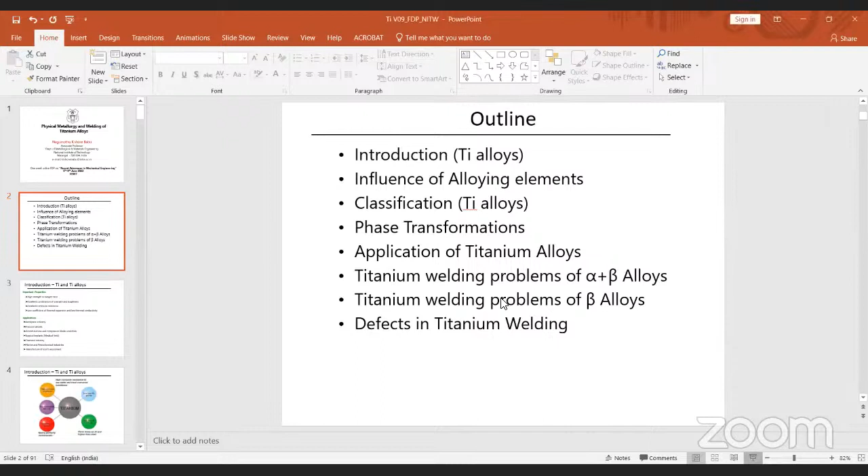Yeah, you can see. Host to disabled participant. Okay sir. Sir, I have given host to you. Yeah, I'm checking. Can you see my screen? Yes sir, your screen is visible. Okay, shall I start? Yes sir, you can start.

Once again, I welcome you for this FDP program on advances in mechanical engineering. Today I'm going to talk about physical metallurgy and welding of titanium alloys. The outline of my presentation includes introduction of titanium alloys, influence of alloying elements, classification of different types of titanium alloys, phase transformations involved in titanium alloys, and different applications of titanium alloys and problems related to welding.

There are three different types of titanium alloys: alpha alloys, alpha beta, and beta titanium alloys. We will also discuss what problems occur during welding, and defects in titanium welding.

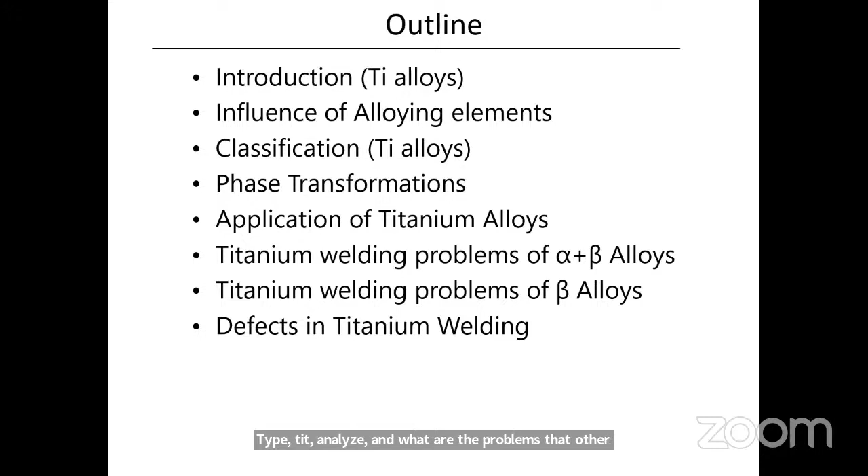Titanium alloys possess high strength to weight ratio, an excellent combination of strength and toughness, good corrosion resistance, low coefficient of thermal expansion, and low thermal conductivity. Because of low coefficient of thermal expansion and low thermal conductivity, these alloys are easier from a welding point of view. High coefficient of thermal expansion, as in aluminum alloys, generates a lot of residual stresses and promotes solidification cracking - this kind of problem will be there. But in titanium alloys, because of low coefficient of thermal expansion and low thermal conductivity, this problem during welding is less.

But all these properties make titanium alloys attractive for different applications like aerospace industry, pressure vessels, surgical implants, aircraft applications, chemical industry, marine and petrochemical industries, and also manufacture of sports equipment. Titanium alloys can be used moderately at elevated temperatures, for example in the range of 370 to 595 degrees, and especially alpha alloys can be used for creep applications, mainly for high temperature applications.

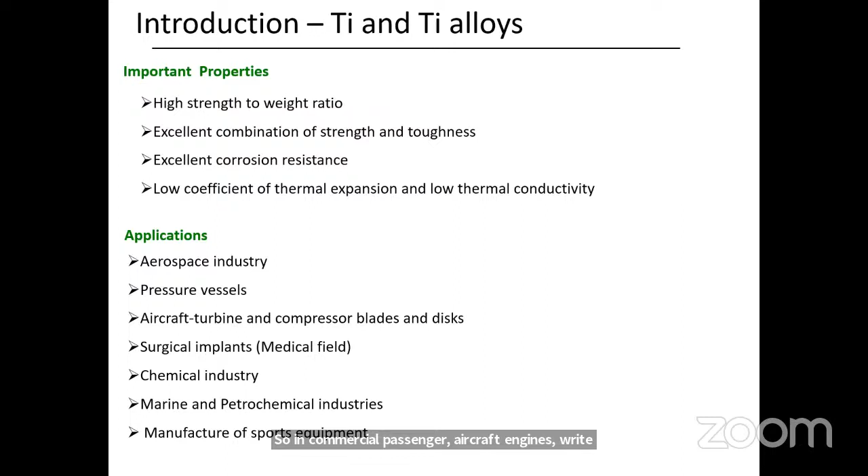If you take the example of titanium alloys, they comprise approximately 42% of the airframe weight of the new F-22 fighter aircraft. In commercial passenger aircraft engines, titanium alloys are used for the fan, the low pressure compressor, and approximately 2/3 of the high pressure compressor. You can see different applications and properties of titanium alloys: high corrosion resistance, low specific gravity, biocompatibility, non-magnetic property, and high specific strength.

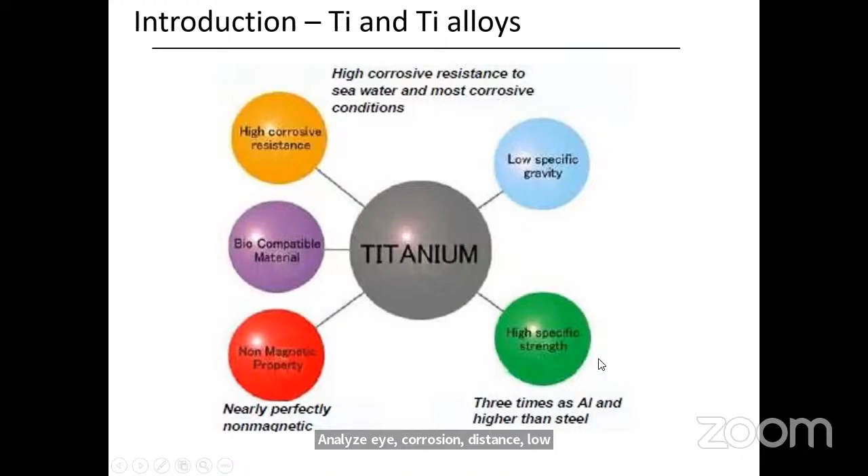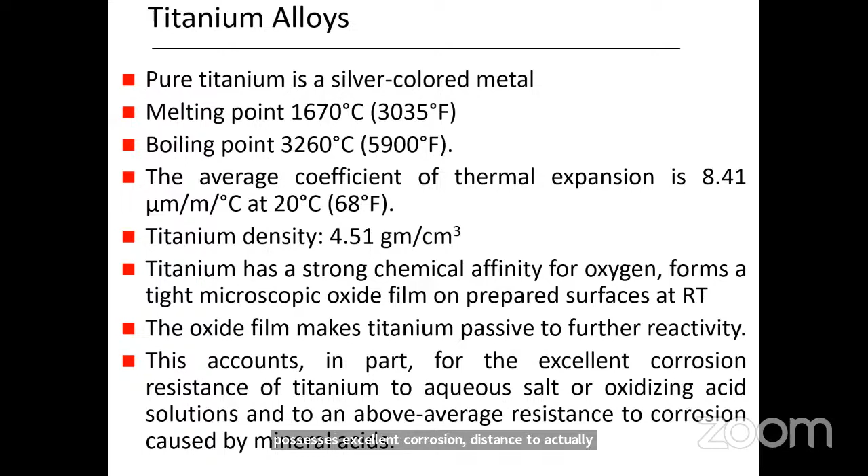Pure titanium generally shows a silver colored metal, with melting point slightly higher than steel at 1670 degrees, boiling point 3260 degrees, average coefficient of thermal expansion 8.41, and density 4.51 gram per centimeter cube. Titanium always has a strong affinity for oxygen, which is why it always forms an oxide layer on the top surface. This oxide film makes titanium passive to further reactivity, and because of this it possesses excellent corrosion resistance to aqueous salt or oxidizing acid solutions, and above average resistance to corrosion caused by many mineral acids.

If you compare the cost of titanium, steel ore costs only $0.02 per LB, but titanium is $0.22 per LB. If you take sheet form, steel is only $0.3 to $0.6 per LB, but titanium costs are very high, $15 to $50 per LB. This high cost of titanium compared to steel and aluminum is because of high extraction cost and high processing cost. The processing temperatures used for titanium are very low, and at these processing conditions the surface regions get contaminated very easily, so these surface cracks must be removed after processing, which requires high cost - that's why titanium sheet cost varies from $15 to $50 per LB.

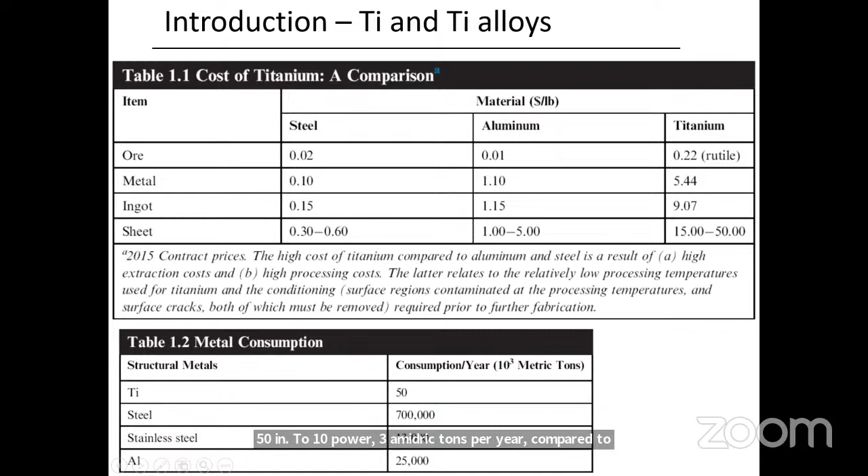Also, metal consumption of different materials you can see here. Titanium consumption is very low because of high cost, at 50 into 10 power 3 metric tons per year, compared to steel at 700,000 and aluminum at 25,000.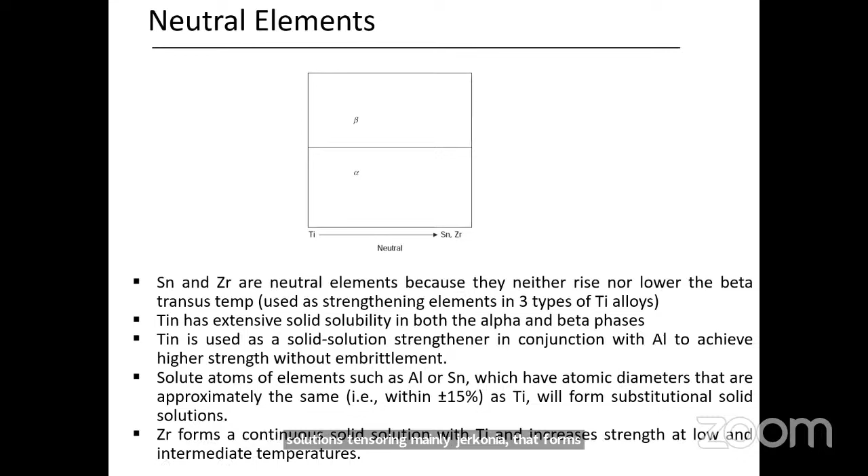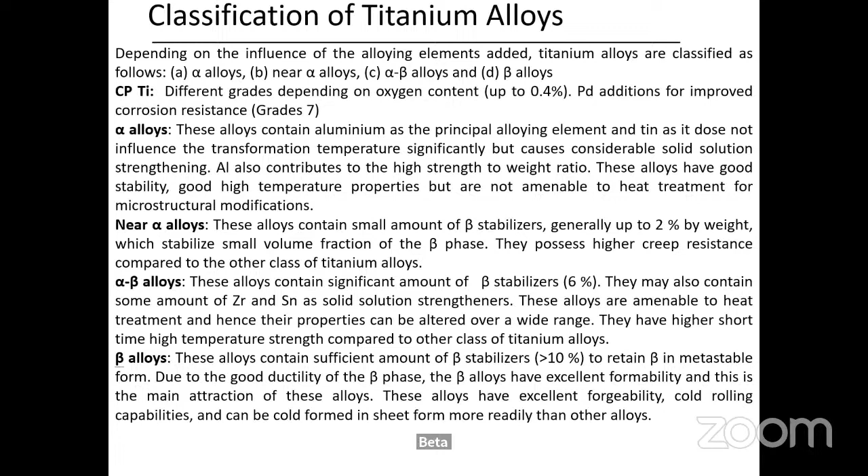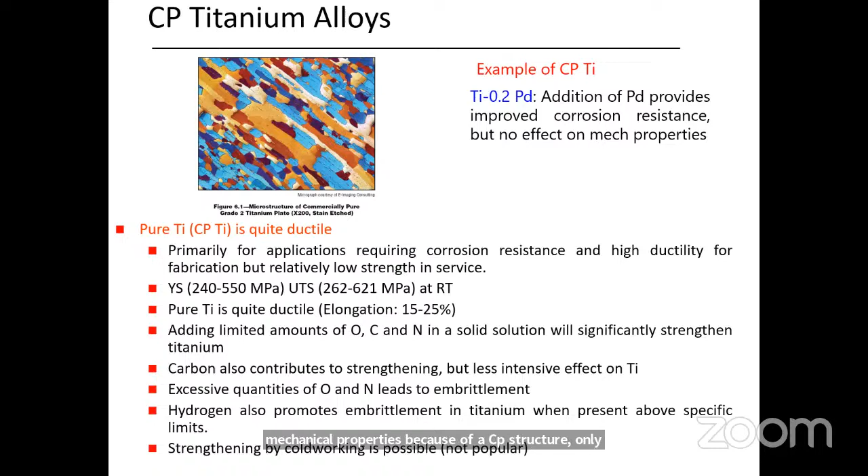Strengthening by cold working is also possible but not popular. Aluminum alloys have an FCC crystal structure, so cold working improves their mechanical properties. But titanium has an HCP structure, so only a limited number of slip systems are available - that's why cold working is possible but not popular.

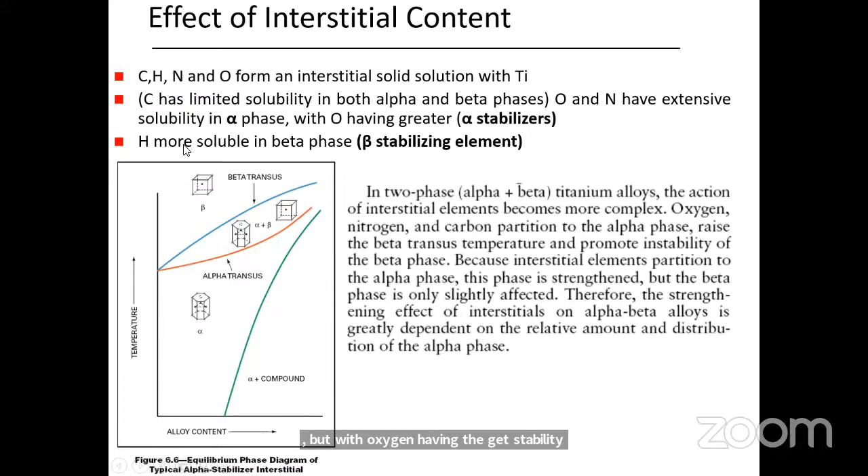Looking at this phase diagram, when you add alpha stabilizers, it raises the beta transition temperature. For example, oxygen, nitrogen and carbon are alpha stabilizers, and they raise the beta transition temperature. These interstitial elements like oxygen and nitrogen have extensive solubility in the alpha phase, with oxygen having the greater stability. Hydrogen is more soluble in the beta phase than the alpha phase.

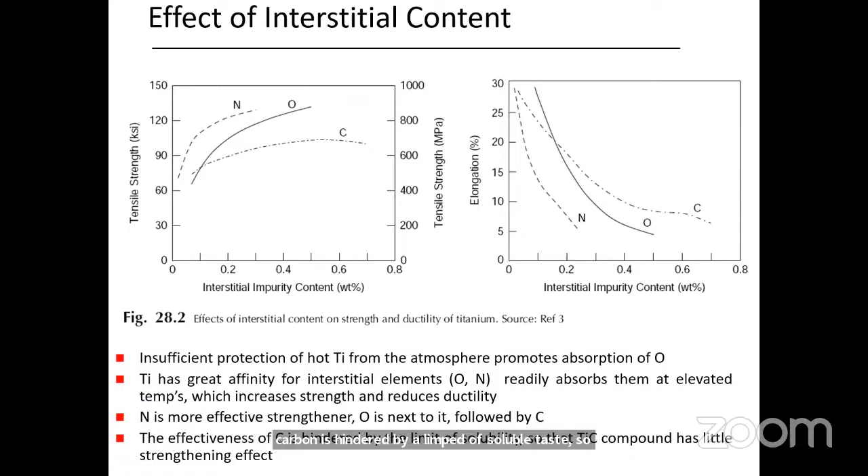This shows the effect of interstitial content on strength and ductility of pure titanium. When adding impurity content like oxygen, nitrogen or carbon, strength keeps increasing - here it's approximately 450, 410 or 420 MPa, but when increasing the oxygen content, strength goes up to 800. So adding interstitial content drastically improves strength, but ductility drastically decreases as impurity content increases. Nitrogen is the more effective strengthener, followed by oxygen, then carbon. The effectiveness of carbon is hindered by its limited solubility, so titanium carbide compounds have a smaller strengthening effect compared to nitrogen and oxygen.

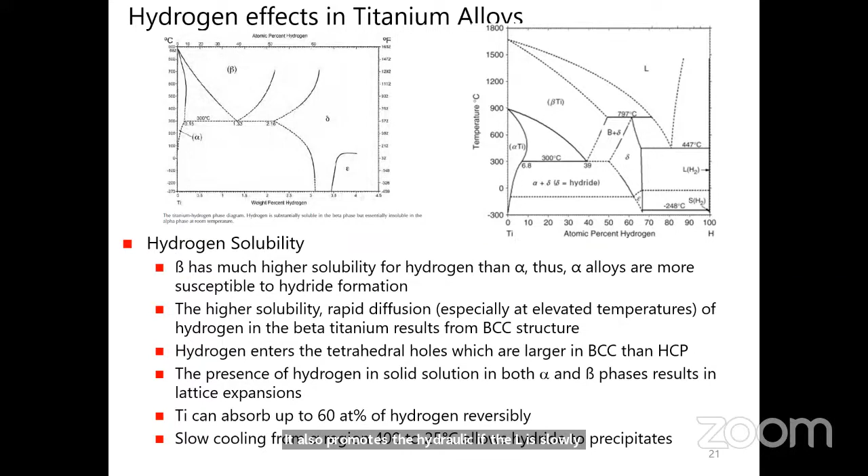The presence of hydrogen in both alpha and beta phases results in lattice expansion. It also promotes hydrogen embrittlement. If the alloy is slowly cooled from the alpha region to room temperature, generally these hydrides start precipitating out, which promotes the hydrogen embrittlement.

Hydrogen is only slightly soluble in the alpha phase. It is soluble only up to 8 atomic percent, but that is approximately equivalent to 0.15%. If the alloy is slowly cooled from the alpha phase field, the hydride starts precipitating out. Even if you cool slowly, it causes notch sensitivity because hydride starts precipitating out throughout the alpha grains and also at the grain boundaries.

When you quench it from the alpha phase field, hydrogen precipitates throughout the alpha grains as very fine particles, but it will have little effect on sensitivity. But when you start aging, again this agglomeration of hydrides takes place, and again it increases the notch sensitivity.

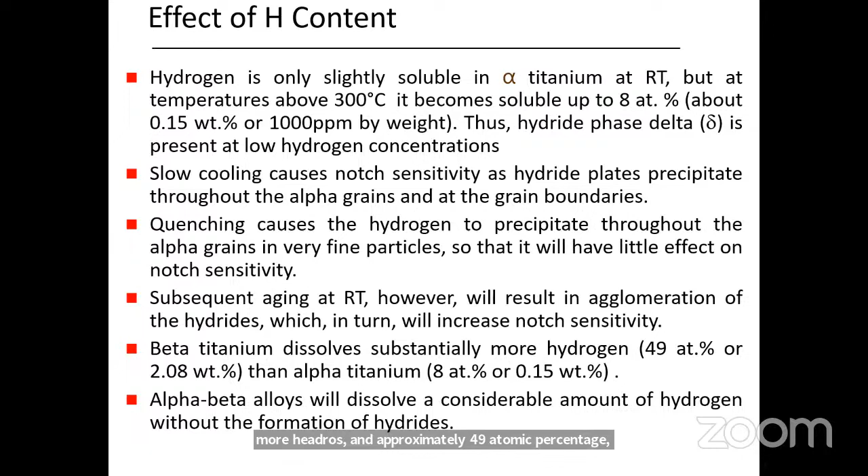So beta alloys, as I mentioned, can dissolve more hydrogen, approximately 49 atomic percentage, which is equivalent to 2.08 weight percentage, compared to alpha. So alpha-beta alloys will dissolve a considerable amount of hydrogen without the formation of hydrides.

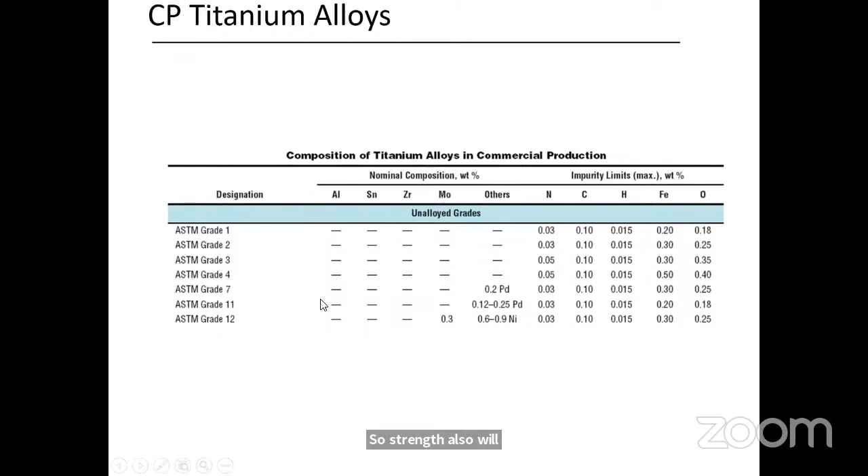In alpha alloys, as I already mentioned, aluminum is the principal alloying element. These alloys also contain zirconium and tin, which are neutral elements mainly added for improving solid solution strengthening. These alloys possess good high temperature properties and weldability, and are not amenable to any heat treatment.

These alloys can also be used for cryogenic applications. You can see these are the different grades of CP titanium alloys or alpha titanium alloys. These alloys contain some amount of oxygen, and the beta transus temperature for these alloys is also given here, along with yield strength and tensile strength values.

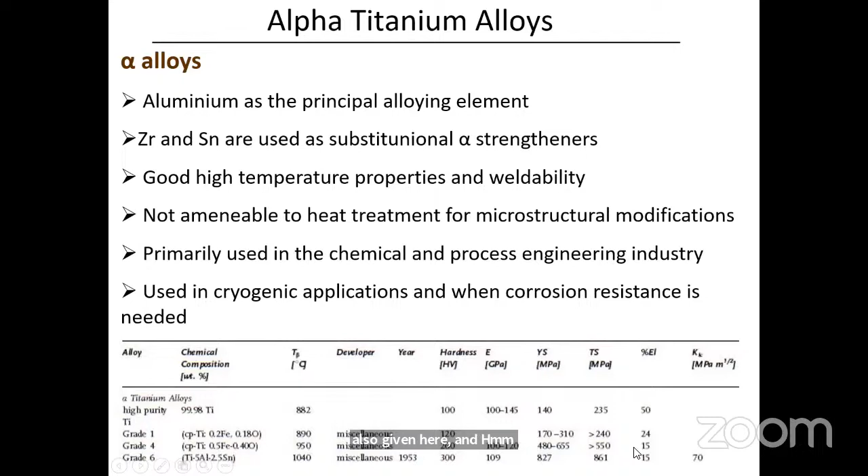So this is the phase diagram between titanium and aluminum. When adding aluminum, up to 6 to 8% can be added in commercial titanium alloys. If it crosses greater than 8%, mainly intermetallics start forming. You see here, in this region Ti3Al is forming, at this region TiAl is forming, and here also, greater than 50% aluminum, it is also forming TiAl2 and TiAl3.

So when you increase the aluminum content, embrittlement occurs. Mainly intermetallic compounds are forming, which is not beneficial - it mainly promotes embrittlement. That's why there is a limit to adding aluminum content in titanium.

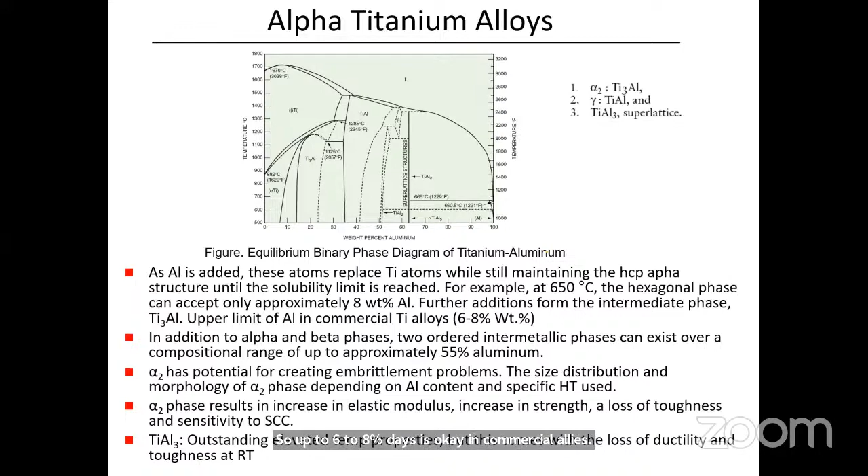So up to 6 to 8% aluminum is okay in commercial alloys. If it is greater than that, many intermetallic compounds will form. If the aluminum content is in the range of 14 to 26, it forms Ti3Al. At 34 to 56, it forms TiAl. These are all intermetallic compounds. Generally, the stability of the alpha phase can be defined using an equation called aluminum equivalent.

Aluminum equivalent equals aluminum plus tin divided by 3, plus zirconium divided by 6, plus 10 times oxygen. When you add small amounts of oxygen, carbon or nitrogen, because it's multiplied by 10, the aluminum equivalent increases. If it crosses greater than 9%, it's a problem - embrittlement occurs. That's why you need to keep the aluminum equivalent less than 9% so it can be used for commercial applications.

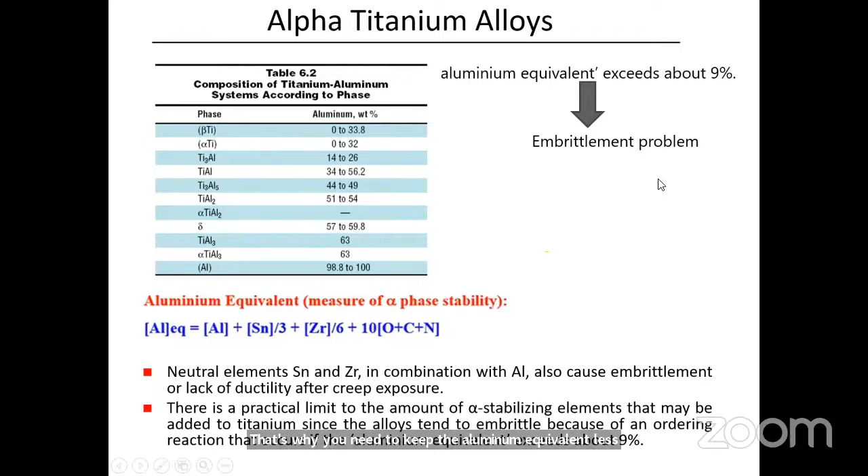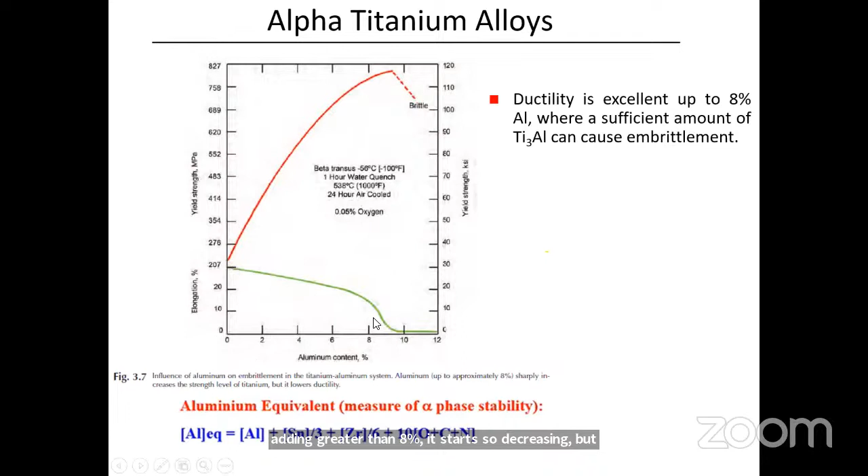Similarly, you see here with aluminum content: if you add greater than 8%, ductility starts decreasing but strength increases. Up to 9%, when you add aluminum content, strength increases but ductility starts decreasing because of this embrittlement problem.

So these are examples of different CP titanium welds used in heat exchanger applications.

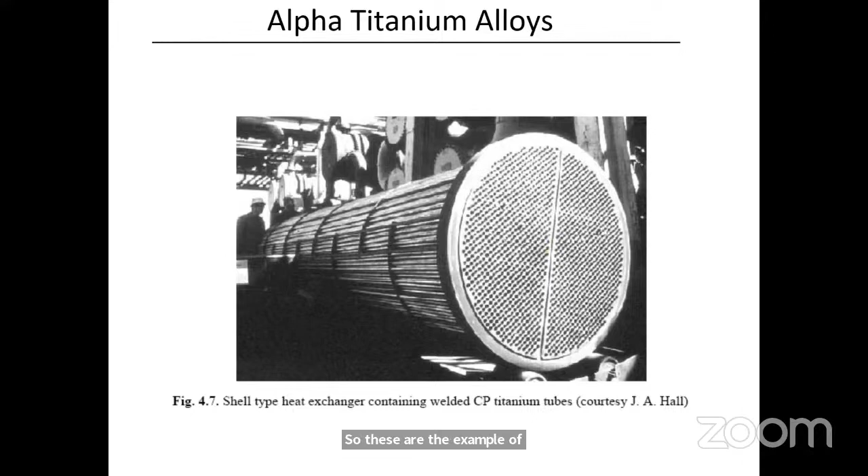These are commercially pure titanium alloys used in different applications in power plants and other industries. You can see water plants, pulp and paper industry, chemical industry, mineral dressing, biomedical devices, spacecraft, and specific equipment from the power generation industry, water plants, and environmental applications - they are used in these industries as well.

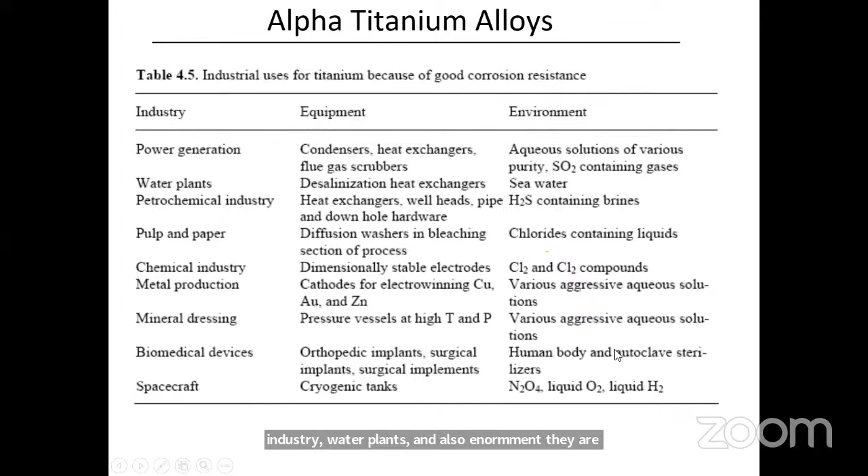So for near alpha alloys, we know that the principal alloying element of alpha alloys is aluminum. In near alpha alloys, it contains some amount of beta stabilizers - you can add up to 2 weight%. These alloys also possess higher creep resistance, and the majority of these alloys contain some amount of carbon and silicon, mainly for improving the creep resistance.

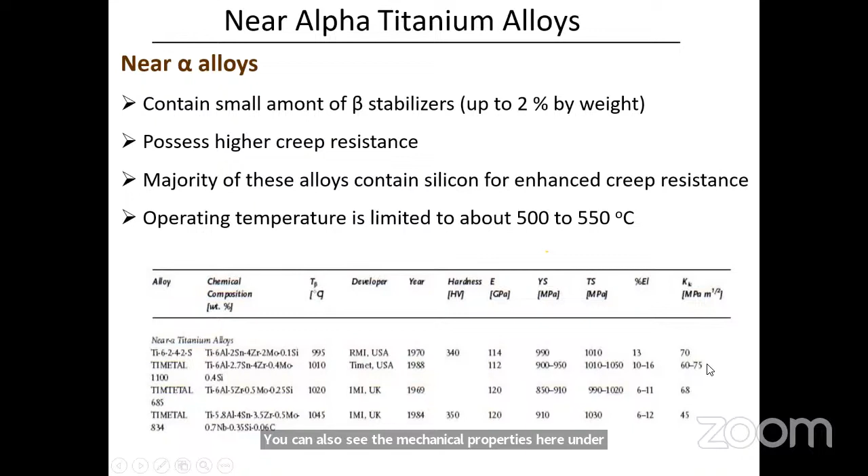So the next classification is alpha beta alloys. These alloys contain a significant amount of beta stabilizers, up to 6 weight%. These alloys also contain tin and zirconium as solid solution strengtheners. You can do heat treatment for these alloys, but near alpha alloys cannot be heat treated. However, creep strength is lower than near alpha alloys. So these alloys can be used either in annealed condition or in solution treated and aged condition.

These alloys exhibit high strength-to-weight ratios in heat treated condition, and also possess good fracture toughness, in the range of 65 to 110 MPa.

The most famous alpha beta titanium alloy is Ti64, titanium 6 aluminum and 4 vanadium alloy. Aluminum is an alpha stabilizer and vanadium is a beta stabilizer. These alloys possess yield strength in the range of 800 to 1100 MPa, and ultimate tensile strength in the range of 900 to 1200 MPa, with a good percentage of elongation - good ductility, having 13 to 16%.

Phase transformations of these alpha beta alloys - you can see here. This is a pseudo binary phase diagram. On the left hand side you see the temperature, and you vary the beta content here, the vanadium content, since vanadium is a beta stabilizer. You vary beta content here, and the titanium 6 aluminum vanadium composition lies in this region. This is titanium 6 aluminum and 4 vanadium.

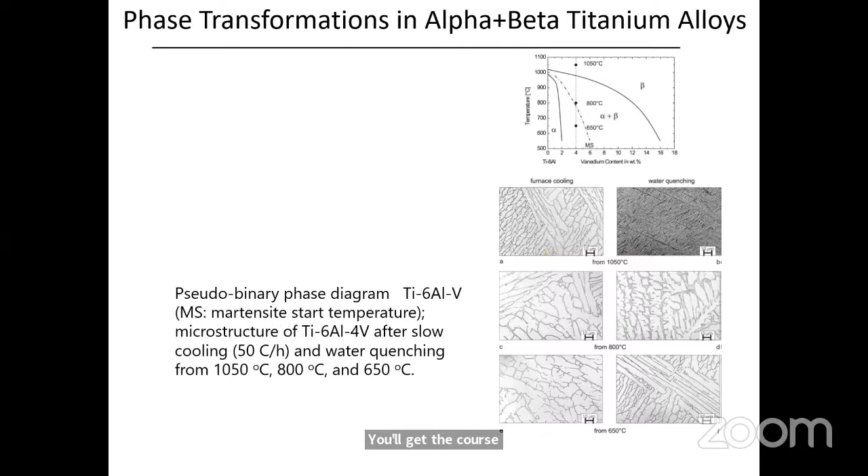So this is a similar kind of diagram, pseudo binary phase diagram, titanium 6 aluminum you can see on the left hand side, and varying vanadium content.

The main problem here is at 840 degrees. If you quench from this temperature, you will not get martensite, because the vanadium content of beta phase is approximately 14%. That is sufficient to place the MS temperature below room temperature. Even if you quench from the beta phase field, you will not get 100% martensite, because the martensite finishing temperature is below room temperature, so some retained beta will be there.

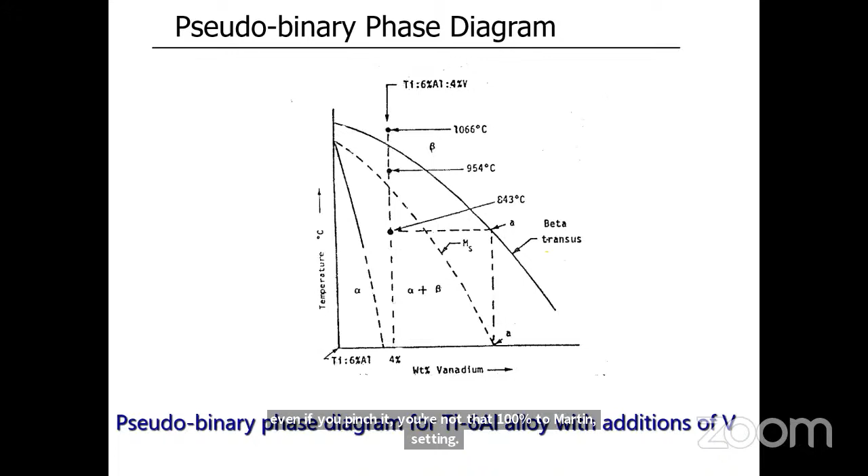Similar to austenite also, even if you quench, you will not get 100% martensite even in steels, because some retained austenite will be there. Similarly, retained beta will be there in titanium alloys. Same thing explained here.

This is the continuous cooling diagram for alpha beta titanium alloys. So during continuous cooling of alpha beta titanium alloys, this line is the beta to alpha transus temperature, and this is the finish of beta to alpha temperature, and in between you can see the alpha plus beta region and different cooling rates. So what happens during continuous cooling?

Principally, the decomposition of beta occurs, so diffusional controlled transformations like nucleation and growth of alpha formation take place. If you quench fast, like this curve, these are the fast cooling rates, then you will also get diffusionless or shear transformation to martensite. Or sometimes, if it is in between, you will get a mixed mode of transformation, that is, initial transformation is a diffusional transformation, then it is interrupted by martensitic transformation.

So here you can see the different cooling curves superimposed on this diagram: A, B, C1 and C2. You can see here cooling rates right of C2, meaning very slow cooling rates. So here you will get a coarse lamellar kind of microstructure. Cooling rates left of C1, this is the critical cooling rate.

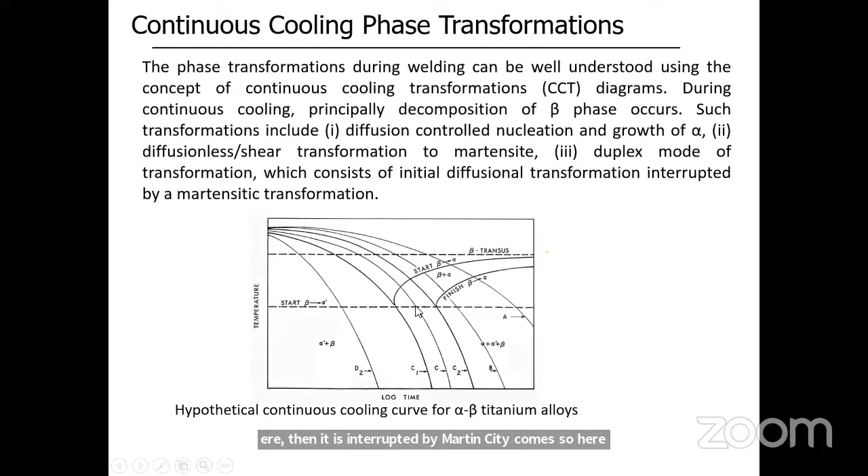So this is transmission electron microscopy of EB welds of Ti64 welds. This is one of my research papers published in Science and Technology of Welding and Joining. These are the TEM micrographs, transmission electron microscopy figures.

Here you can see how the martensitic microstructure will appear: the alpha prime martensite in a zigzag fashion. And also you can see the lines present here, these are the dislocations. We also obtained a diffusional product, which means we got a mixed mode of transformation. So the initial transformation is alpha-beta transformation, that means a diffusional product you will get, which is then interrupted by martensitic transformation.

When you do aging for this martensitic microstructure or this retained beta, for Ti64 alloy, a fine dispersion of beta in alpha is formed. Alpha starts precipitating out from the beta phase, and also you can see the beta particles also start precipitating out from the alpha prime.

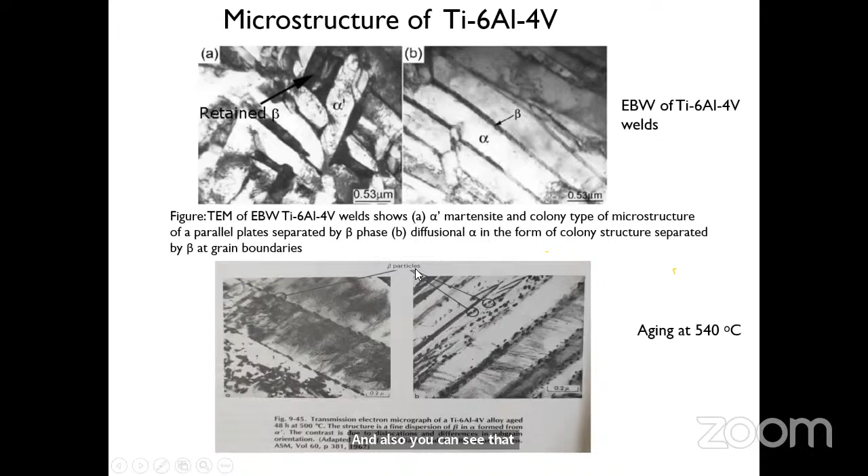Beta alloys contain sufficient amounts of beta stabilizing elements. So greater than 10%, when you add beta stabilizers, it retains beta even at room temperature, meaning there is no alpha phase. So when you keep on adding beta stabilizers, greater than 10%, it can retain the beta phase.

Because of the good ductility of the beta phase, beta alloys possess excellent formability, and also these alloys possess excellent forgeability and cold rolling capabilities. You can easily weld these alloys in the annealed condition.

So the most famous alloys are titanium 1533. These alloys contain 15% vanadium, 3% chromium, 3% aluminum, and 3% tin. In the annealed condition, yield strength is in the range of 800 to 1000, and tensile strength 800 to 1100. When you do aging, you can still increase the strength, but ductility will decrease.

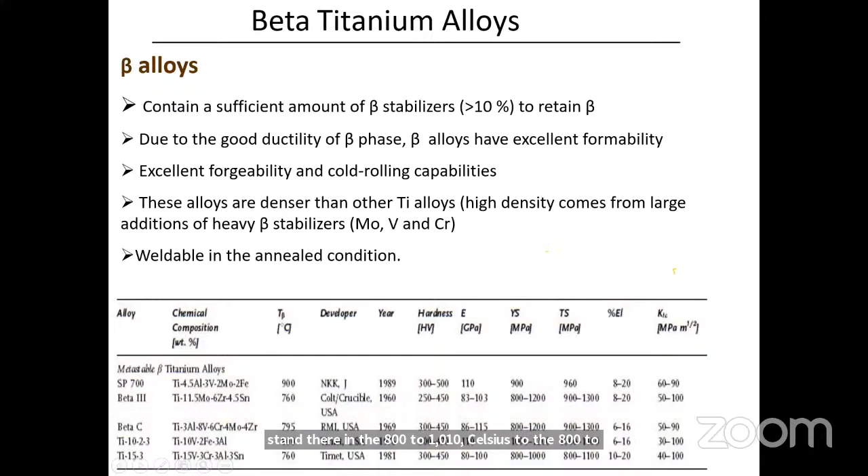So beta alloys are again divided into two types: metastable beta and stable beta alloys. This dotted line is the MS, martensitic starting temperature, and this line is the beta starting, beta transus line, this is what it's called. So if it is in between, then it is called metastable beta alloys. If the beta stabilizing element crosses this beta S point, then it is called stable beta alloys.

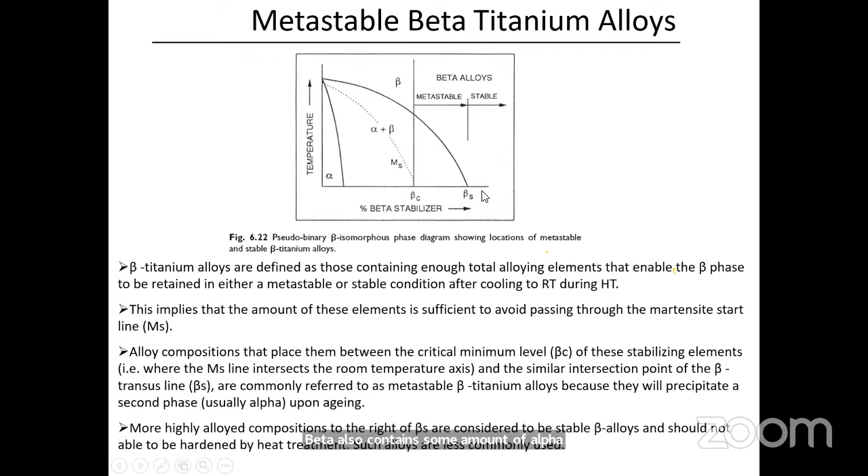So the critical minimum level is called beta C, where this MS line intersects the room temperature axis. In between this region is called metastable beta. Metastable beta also contains some amount of alpha stabilizers. But stable beta means when you are adding more beta stabilizers, greater than 10%, this beta phase will be retained even at room temperature.

So these are the beta stabilizers, you can see vanadium, niobium, these are different beta stabilizers. The stability of the beta phase can be defined using a formula called molybdenum equivalent: molybdenum plus 2.5 times iron, 1.7 times cobalt. These elements are iron, chromium, cobalt, manganese, nickel, and chromium, and these solutes are more effective than molybdenum because they're multiplied by 2.5 times, 1.7 times. Other elements like 0.67 times vanadium are less effective than molybdenum, so these are less stable.

Suppose this molybdenum equivalent is 0 to 5%, these are beta-rich alloys. If it is 5 to 10%, that is near-beta. Metastable beta means if it is in between 10 and 30%, these alloys are called metastable beta alloys. If the molybdenum equivalent is greater than 30%, that is completely stable beta. So these are examples of different metastable beta and beta alloys: 10-2-3 means this is a metastable beta alloy, and stable beta means if it is 30 and above, it is called stable beta alloy, based on molybdenum equivalent.

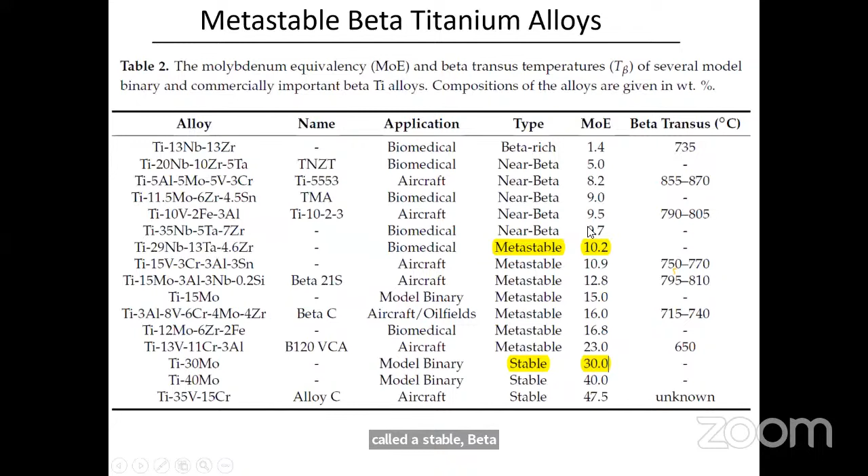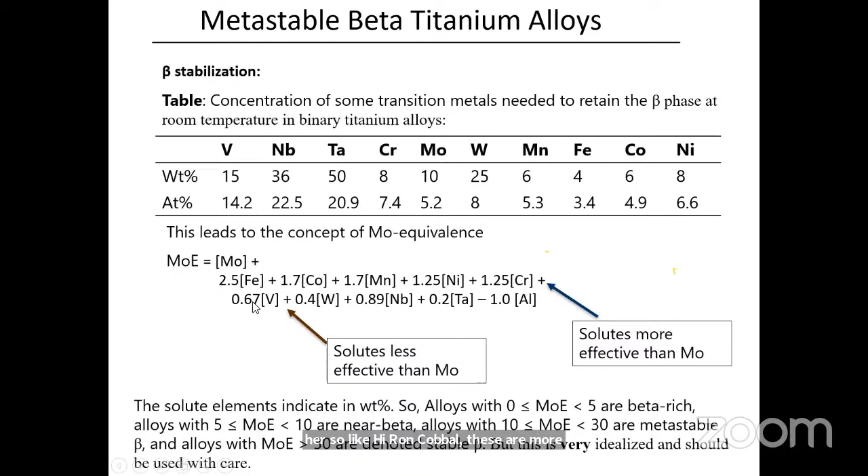And here you can also see the different beta transus temperatures for these alloys. So this shows the influence of alloying on the concentration necessary to retain 100% beta. Some alloying elements, as I showed previously, like iron and cobalt, are more effective than other elements. That's why when adding iron, only 3.5% can retain 100% beta even at room temperature. But for tantalum, if you want to retain the beta phase at room temperature, you need to add 45%. So that is the difference between different alloying elements on beta phase stability.

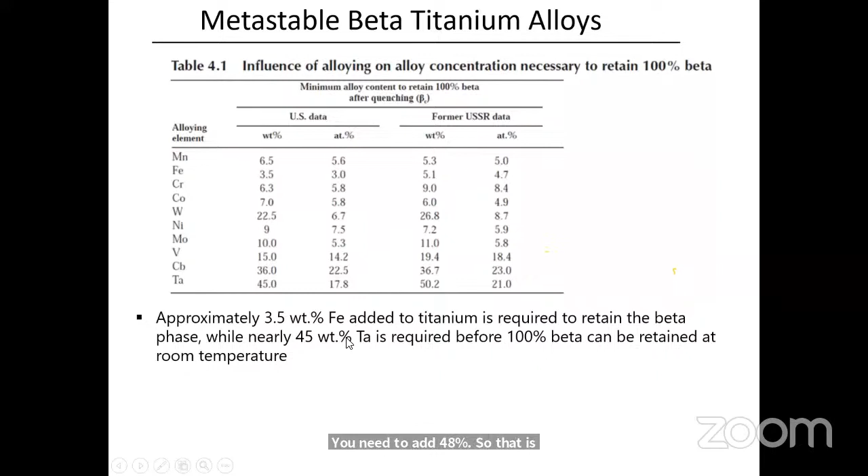So metastable beta alloys possess a BCC structure. Because of the number of slip systems available, you can readily do cold working in the beta phase field. After quenching, you will get equiaxed beta phase. These alloys you can heat treat: the first step is heating above the beta transus temperature, followed by quenching, and then you do aging heat treatment, generally at 500 to 600 degrees.

Then alpha starts precipitating out, and you can increase the strength, but ductility will be drastically decreased. These alloys possess excellent fabricability and good tensile strength. When you start adding beta stabilizers, the creep strength will be decreased. They have good weldability, and this is an example of a metastable beta alloy. These alloys are generally used in the solution treated and aged condition.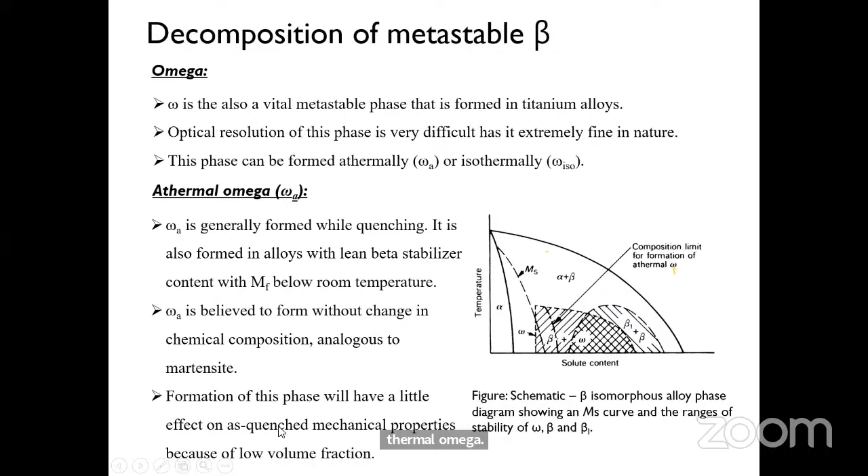Suppose if you are heating this metastable beta alloy in the temperature range of 300 to 350 degrees centigrade, and holding for sufficient time, then isothermal omega starts precipitating in this region. That means if you are keeping for more than 24 hours at 200 to 500 degrees, then omega starts precipitating out. Then it is called isothermal omega.

This isothermal omega has composition intermediate between alpha and beta, and as you keep increasing the aging time, this omega will act as a precursor for the formation of alpha phase. If the isothermal omega percentage is greater than 50%, then embrittlement problems occur.

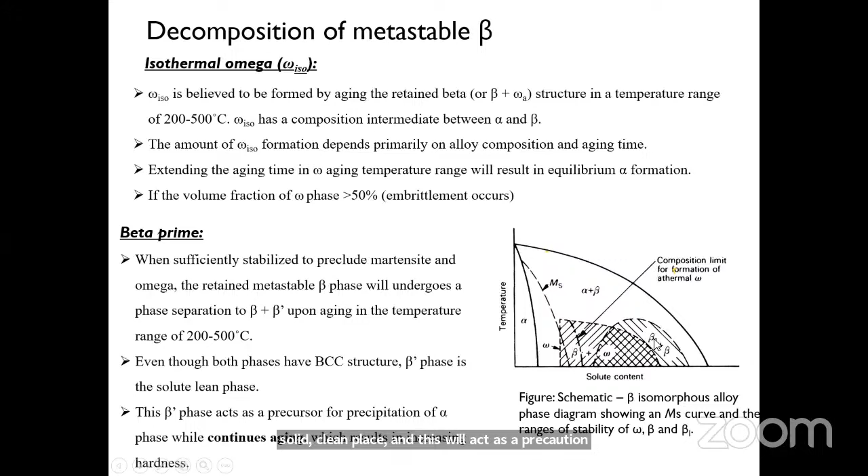But still, if you are adding more solute content, then beta prime starts precipitating. Generally beta prime is a solute lean phase, and this will act as a precursor phase, and as temperature increases, as aging time increases, alpha starts precipitating out from the beta prime phase.

So generally in metastable beta alloys, two-step aging is preferable. First step aging is done at 300 degrees and second step aging at 500 degrees. In the first step aging, if the alloying content is low, omega phase will form; if the alloying content is high, beta prime will form.

Precursor phases like omega and beta prime form in the first step aging. Upon continued aging, this will act as a precursor and alpha starts precipitating out, forming fine alpha platelets. That is responsible for increasing the strength.

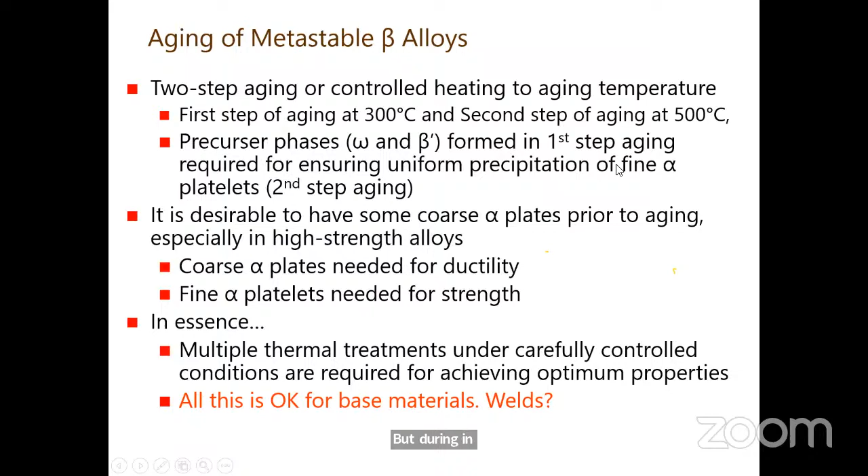If overaging occurs, the alpha platelets start coarsening and will increase, then your strength will decrease. But during aging in general, if fine alpha platelets are forming, generally strength will increase and ductility will decrease. So far we have discussed alpha alloys, alpha beta, and beta alloys.

Alpha alloys are generally used for high temperature application, creep application. When you are adding beta, increasing beta content, the heat treatment response will increase. Alpha alloys are not amenable to any heat treatment, but heat treatment response will increase. But creep strength will decrease in this region and beta region.

But here you can see increasing alpha content; when you are adding more alpha stabilizers, creep strength will increase. From right hand side to left hand side, these alloys are mainly for creep strength, and moving the other way improves heat treatment capability, and also suitability for fabricability, meaning suitable for cold rolling applications.

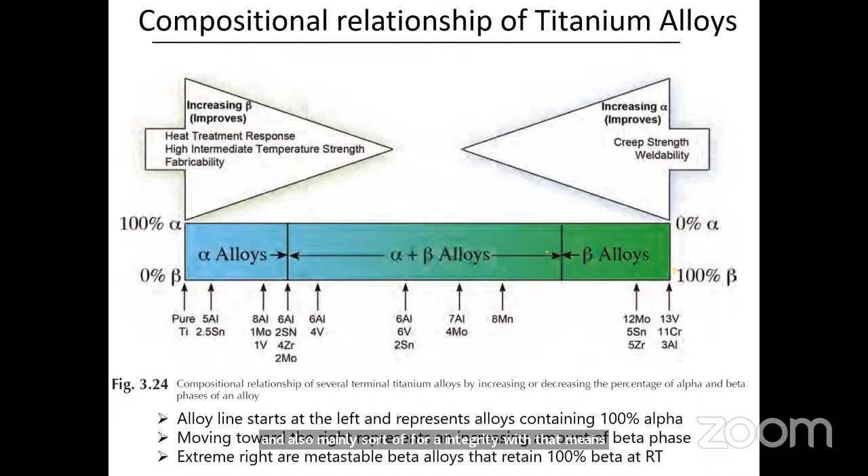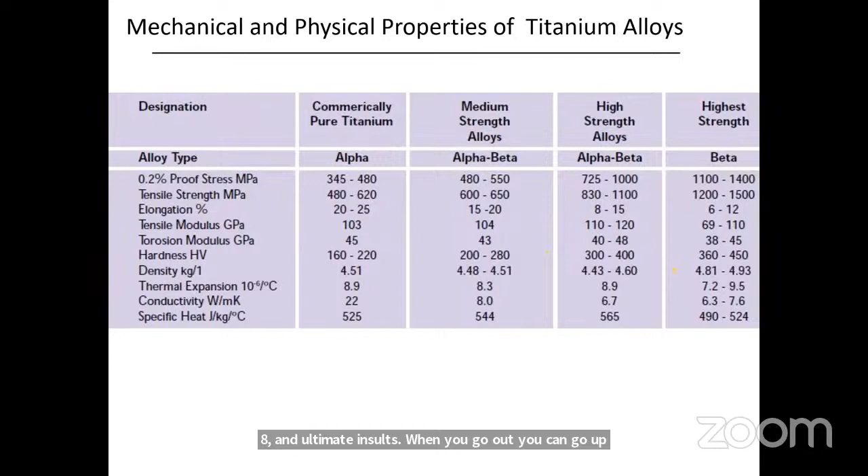These are different examples of alpha, alpha beta alloys and you can see the mechanical properties. The alpha beta alloys generally vary from 800 to 1000 MPa yield strength, and ultimate tensile strength can go up to 1100 MPa. But beta alloys give even higher strength because alpha starts precipitating out during aging. These are examples like titanium 6 aluminum 4 vanadium alloy used in jet engine applications.

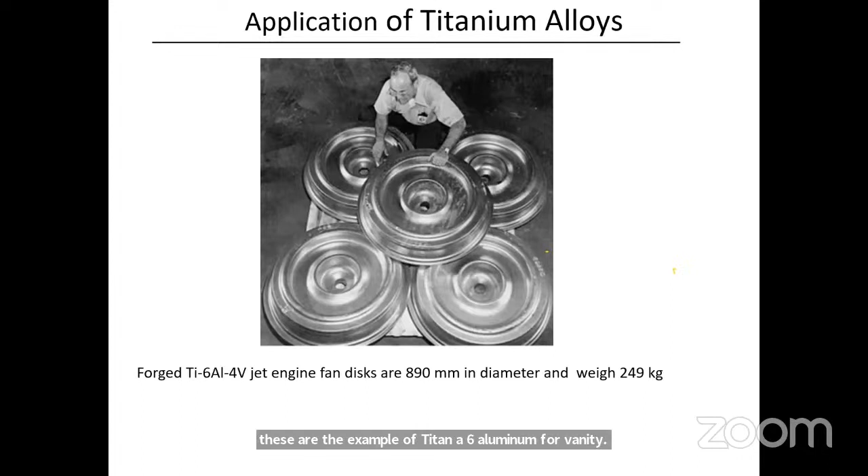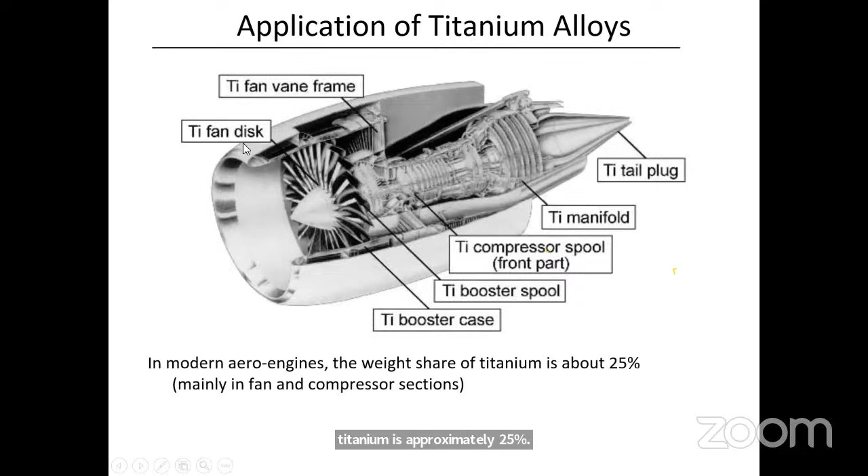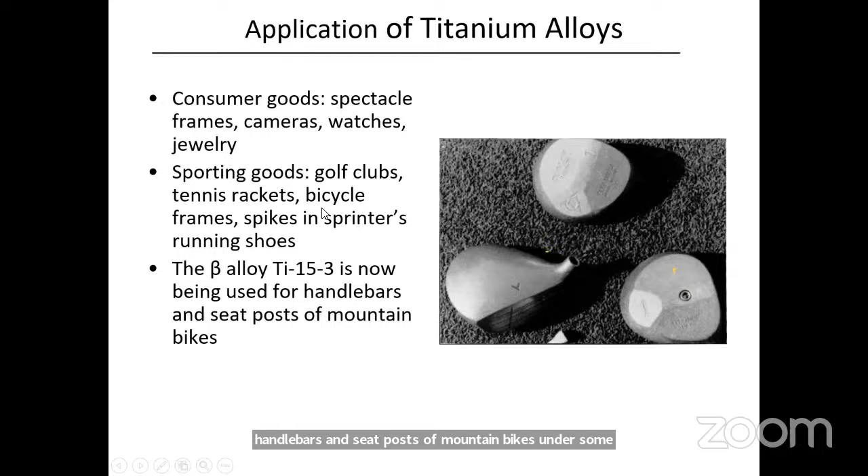Titanium alloys are also used in sports applications. The metastable 1533 beta alloy is used for handlebars and seat posts of mountain bikes, and some sporting goods like golf clubs, tennis rackets, and bicycle frames. So these are also made of titanium alloys.

Metastable beta alloys, especially these beta titanium alloys, can be used because these alloys possess low modulus and high strength. That's why these alloys are used mainly for automotive suspension coil, rotor, and connector applications. Nowadays many parts used for automobiles are made of steel that can be replaced with beta titanium alloys. The main advantage is weight saving applications by replacing with these alloys.

Titanium alloys are also used in human body applications and dental applications. Here you can see hip or knee prosthesis - good corrosion stability in the human body, and these alloys possess good fatigue resistance, high strength to weight ratio, and low elastic modulus. Beta titanium alloy especially has low elastic modulus compared to other alloys. This low elastic modulus is particularly relevant because it's an important requirement for bone replacement.

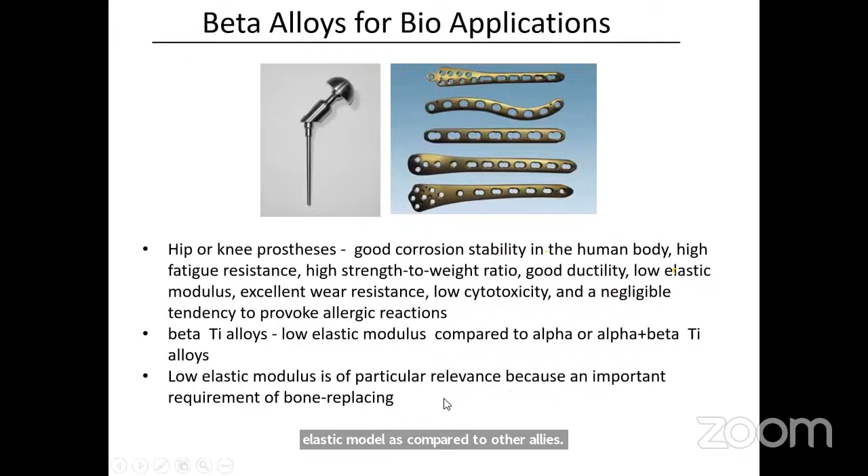So far we discussed alpha, alpha-beta, and beta titanium alloys. Now I'm going to talk a little about titanium welding.

When doing titanium welding, titanium readily picks up gases like nitrogen, oxygen, and hydrogen, which are interstitial elements that can easily enter the titanium lattice if the temperature exceeds 430 degrees. They occupy interstitial sites, which reduces the number of slip systems. So the strength increases, but ductility decreases. The number of dislocation systems also decreases, so deformation is not that easy.

If interstitial elements exceed certain limits, stresses generated during welding may cause cracking. Here you can see the cracking. Generally, oxygen levels on the order of 3000 ppm in the weld metal may be acceptable. If it exceeds that, cracking generally occurs in the weld metal zone or heat affected zone.

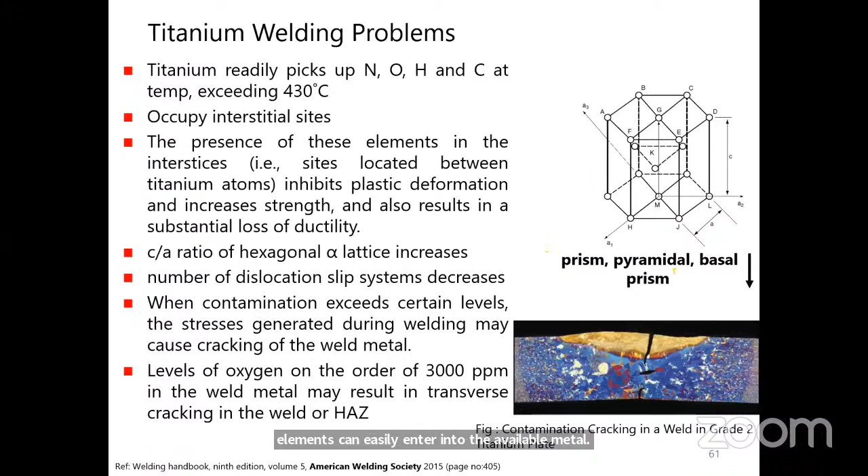That's why when doing arc welding with titanium alloys, in TIG welding or MIG welding we use argon or helium as shielding gases. But in addition to torch gas, we need to provide backing and trailing gases also for welding titanium alloys. Otherwise, these elements can easily enter the weld metal and degrade the mechanical properties, and sometimes promote cracking. Above 650 degrees titanium tends to oxidize more rapidly, and if you don't remove the oxide layer, it is a problem. That's why you need to use protective shielding such as an inert gas atmosphere, like argon shielding.

Trailing and backing gases also need to be used. Another advantage is the relatively low coefficient of thermal expansion and conductivity of titanium, which reduces the possibility of distortion caused by welding. Aluminum alloys possess high coefficient of thermal expansion, which is a problem - lot of distortion problems occur. But those problems are not there in titanium alloys because of low coefficient of thermal expansion.

Thermal conductivity of titanium is 1/2 of stainless steels and 1/10 of aluminum alloys. In aluminum alloys, because of high thermal conductivity, heat cannot concentrate at one point, so you need to use high currents and high heat input. But because of the low conductivity of titanium alloys, you can use low currents also. The linear coefficient of thermal expansion of titanium is generally lower than that of aluminum alloys and steels. Electrical resistivity of titanium is also lower than precipitation hardened stainless steels and 10 times greater than aluminum alloys.

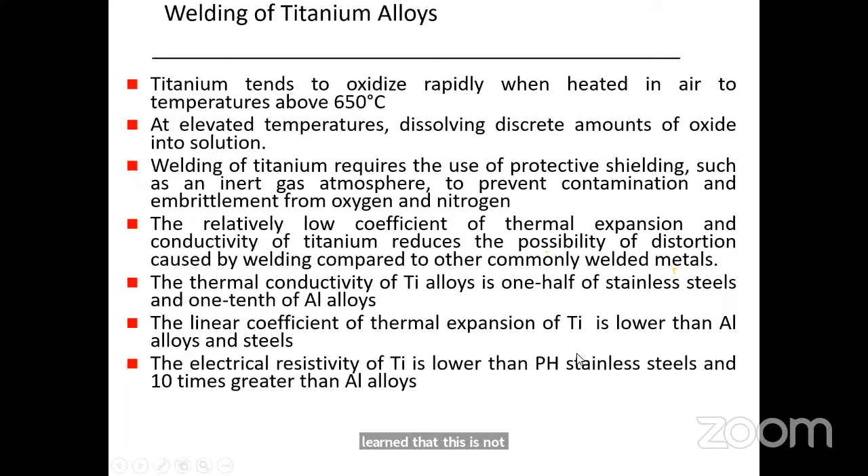If hydrogen and oxygen are absorbed, they can easily enter the weld pool if moisture is present on the sample. That's why before welding you need to remove the oxide layer using a stainless steel brush, and also clean with acetone. If necessary, sometimes you can do a pickling operation also, so that you can remove the hydrogen and oxygen content, or any moisture present on the sample. If you don't remove the oxygen, these interstitial elements can easily enter and degrade the mechanical properties.

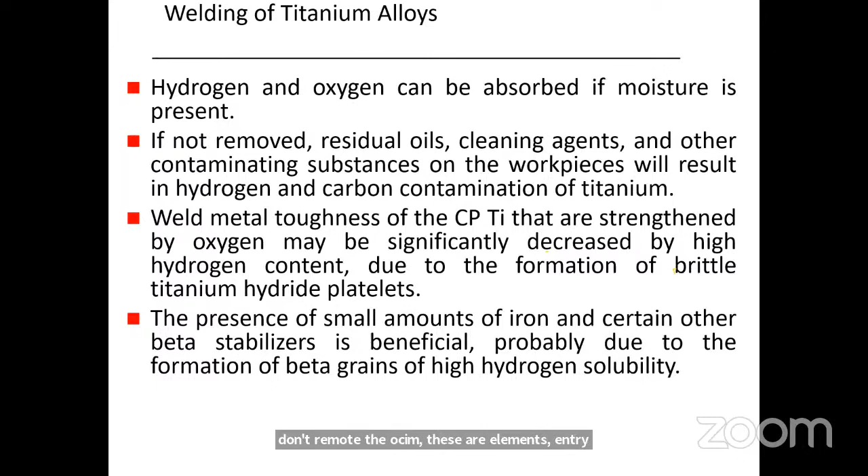Titanium alloys are extremely reactive and sensitive to contamination. You can use different welding processes like GTAW (gas tungsten arc welding), gas metal arc welding, plasma arc welding, electron beam welding, laser beam welding. You can also weld with friction welding.

An important point is that you need to use high purity shielding gases, and also backing and trailing gases. If there are no backing and trailing gases, you can also try glove box welding - you need to fill the glove box with argon atmosphere and do the welding. There are no serious hot cracking problems like in aluminum alloys, but if the impurity content increases, then it promotes cracking. Matching fillers are also available, though there is limited availability of filler wires.

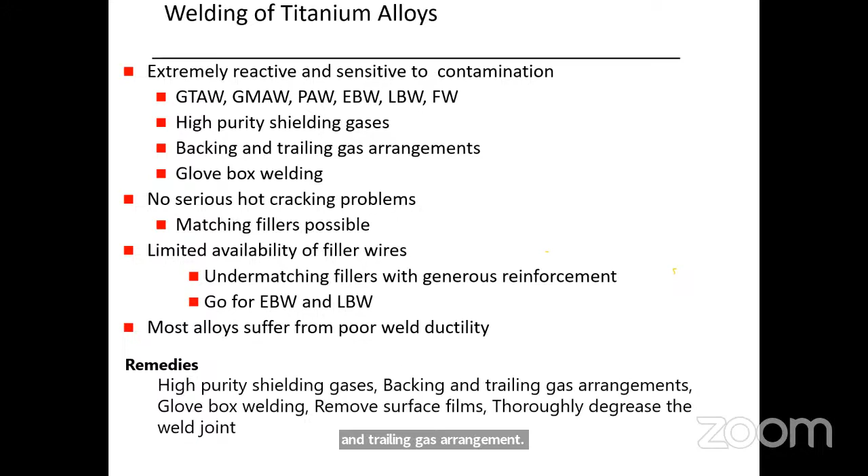You can use electron beam or laser welding processes. Electron beam welding especially is carried out in vacuum, so you get very high quality welds compared to arc welding. Most alloys suffer from poor weld ductility, but these problems can be avoided by choosing proper shielding gases and arranging proper backing and trailing gas arrangements. You also need to remove surface films before welding and thoroughly degrease the weld joint.

These are the microstructures of different titanium alloys, specifically the metastable beta titanium 1533 alloy. You can see equiaxial grains present in the fusion zone, and epitaxial growth occurring from the prior beta grains present in the base metal or heat affected zone, growing epitaxially from the beta grains.

The beta grains present at the edge of the fusion boundary act as an ideal substrate for the growth of grains. This kind of growth is called epitaxial growth. Because of the high thermal gradient present in laser welds, you can see coarse columnar grains extending from the fusion boundary towards the weld center.

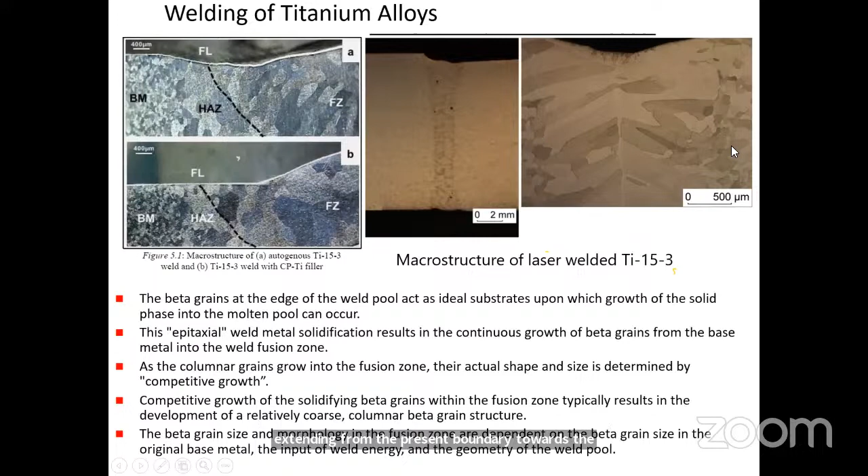Interstitial elements like oxygen, hydrogen, and nitrogen, if present in the weld metal, degrade the mechanical properties. Poor ductility is mainly associated with large prior beta grains and acicular martensite. If martensitic microstructure is present in the weld metal, strength will increase, but ductility will be drastically decreased.

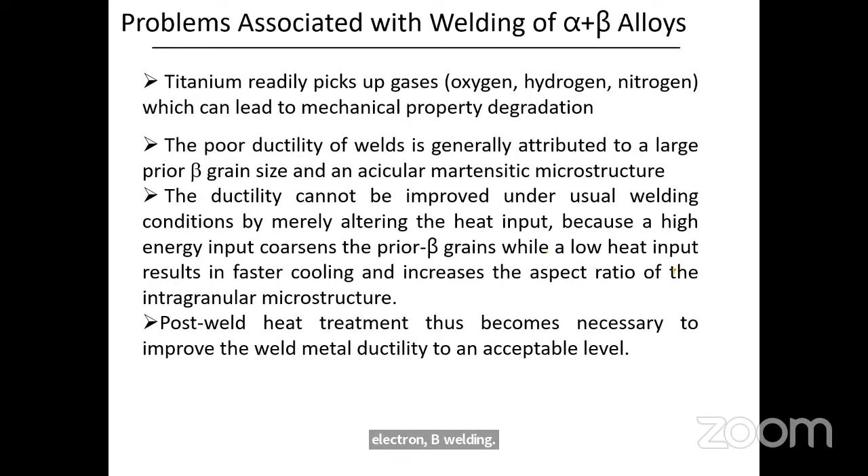In order to improve the ductility, if it is GTA welding, you can do pulsing or manipulate the arc, or try arc oscillation. You can use a low heat input process like electron beam welding, or do post weld heat treatment, which is mainly necessary to improve the weld metal ductility to an acceptable level.

These are the microstructures of the base metal after welding. In this TEM micrograph, the white area is alpha and the dark lines are beta. Alpha parallel platelets are separated by beta phase in between them.

After doing any current pulsing technique in GTAW, the grains will be refined and you will get good strength and ductility.

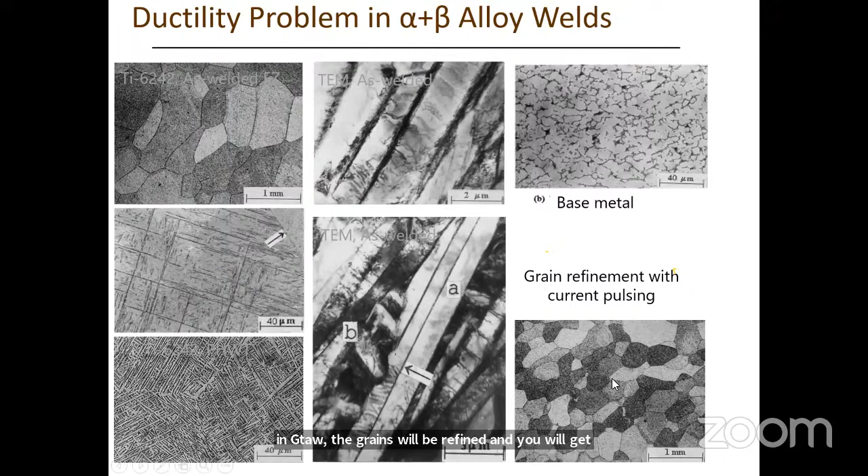Generally, if you are using any welding process, it generates some kind of residual stresses. Also, if you use a low heat input process like electron beam welding, you will get martensitic microstructure, especially in these alpha beta titanium alloys.

The main purpose of post weld heat treatment is to relieve residual stresses, or modify the metastable weld zone microstructure, and stabilize the microstructure for elevated temperature weld structure applications. The ultimate aim of post weld heat treatment is to enhance the mechanical properties.

Generally, post weld heat treatment for near beta and alpha beta titanium alloys is carried out at 400 to 550 degrees centigrade, so that micro precipitation of beta starts coming out, which can precipitate from the alpha prime martensite, and also some alpha starts precipitating out from the beta phase if any beta retains in the microstructure.

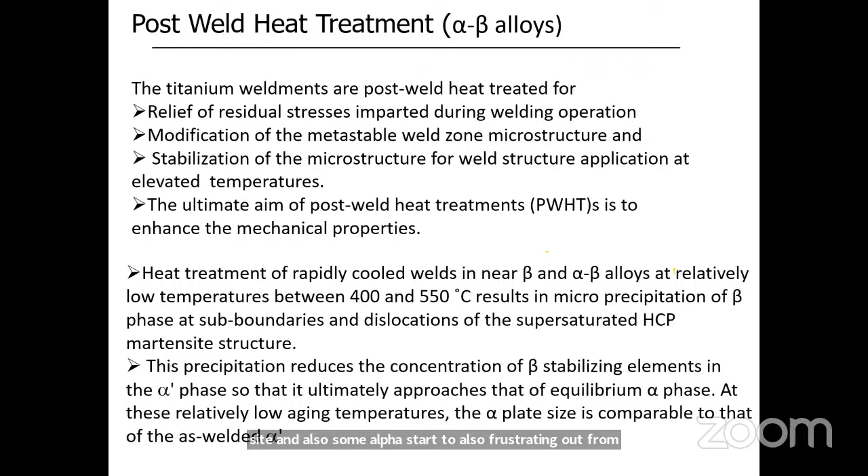Especially for beta alloys, there are no serious cracking problems. The main problem with beta alloys is grain boundary alpha formation, which even occurs during welding. Even during post weld aging, it still thickens and decreases the ductility. Segregation problems and non-uniform strengthening precipitates forming throughout the weld are also a problem.

So you must either compromise on strength or ductility. Generally in the as-welded condition, you will get low strength, but when you start aging at 500 degrees centigrade, alpha starts precipitating out, then strength will increase but ductility will be drastically decreased. This is the metastable beta titanium alloy, titanium 10-2-3.

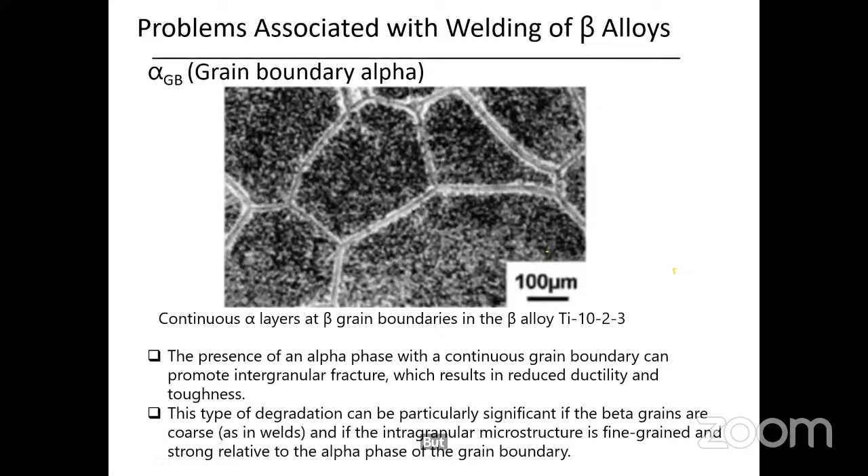Here you can see the continuous grain boundary alpha that is forming. When you do a tensile test, the stress concentration takes place in this region. It generates triaxial stresses, and the metal strength can improve, but ductility will be drastically decreased because of this grain boundary alpha.

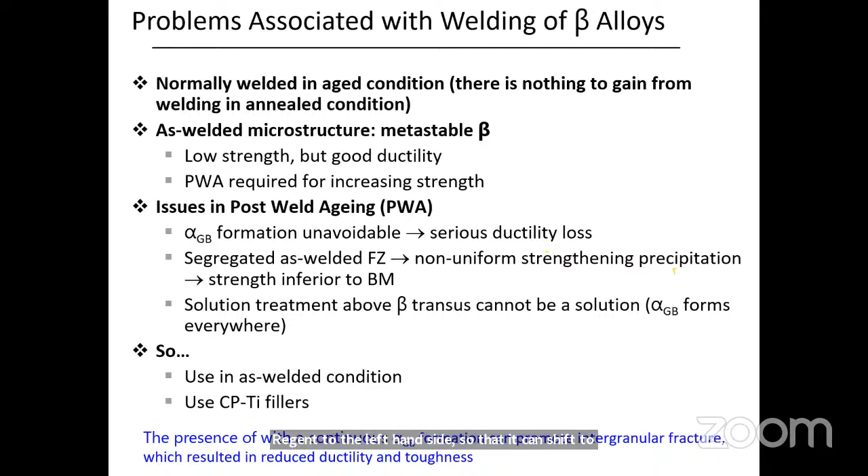So this we already discussed. If you want to control this, if you want to reduce the grain boundary alpha, you can choose another filler metal, like in the alpha plus beta region filler or CP titanium filler, so that it can shift the metastable beta region to the left hand side, to the alpha plus beta region, so that you can improve the ductility.

So generally for metastable beta alloys, two-step aging is generally preferable. In the first stage of aging at 300 degrees centigrade, either omega or beta prime will form, depending upon the alloy content. And when you do aging at 500 degrees centigrade, whatever phases or precipitates formed at 300 degrees centigrade, like omega or beta prime, act as precursor phases upon which alpha starts precipitating out.

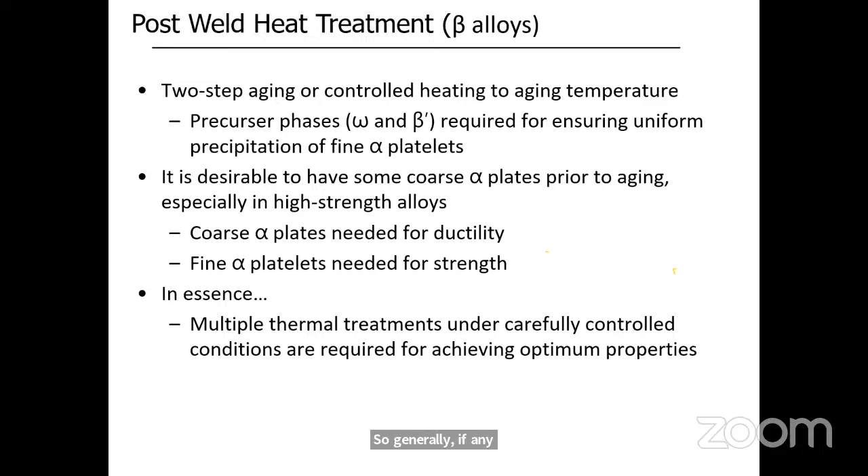So generally, if coarser alpha platelets are present, ductility will improve. If fine alpha platelets are present, strength will improve, but ductility will be drastically decreased.

So these are generally weldability issues for different titanium alloys. CP titanium and alpha alloys are generally weldable and give good ductility. Alpha beta alloys are weldable, but because of a large amount of alpha prime martensite, ductility will be less. And metastable beta alloys are weldable with good ductility too, but when you do aging, grain boundary alpha will form. That is a problem - strength will increase, but ductility will drastically decrease.

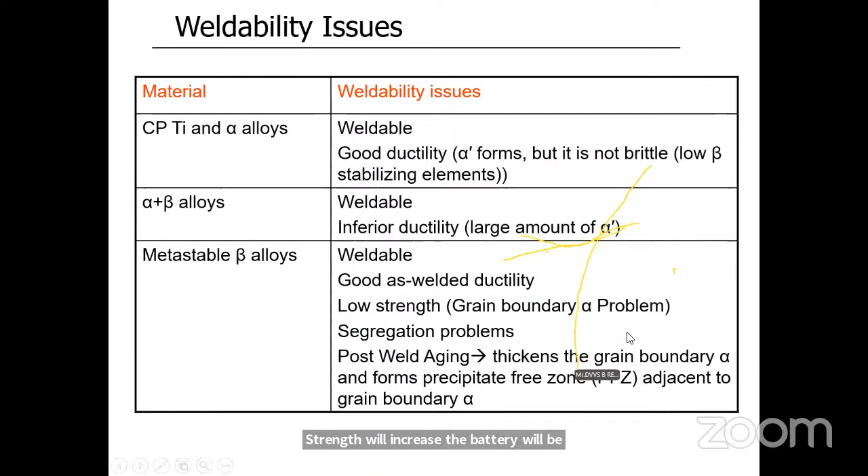So the main defects in titanium alloys are weld metal porosity, which you will get if you don't choose proper shielding - gases may enter between the dendrites and it's difficult to escape, that's why porosity forms. Embrittlement mainly occurs because of hydrogen, nitrogen, or oxygen contamination. Contamination is the main problem.

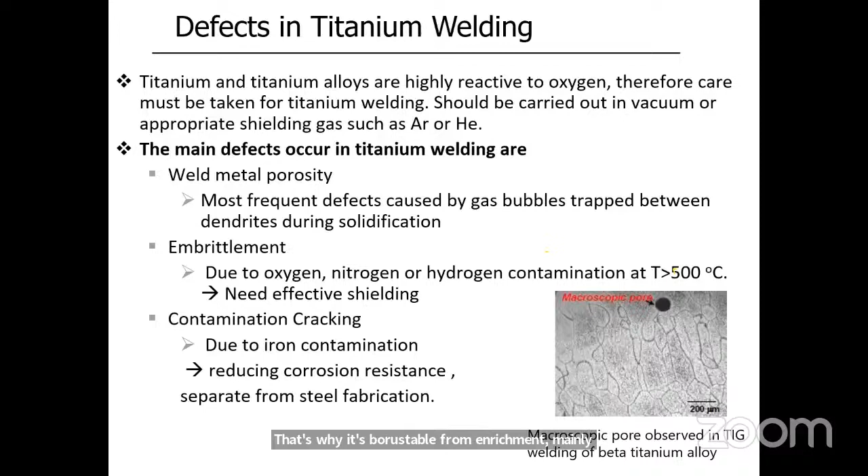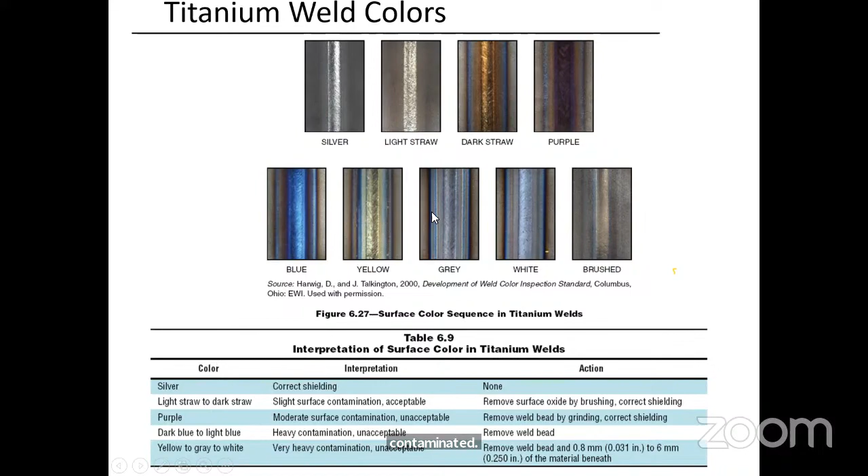So with this, I will stop here. If you have any questions, you can ask.